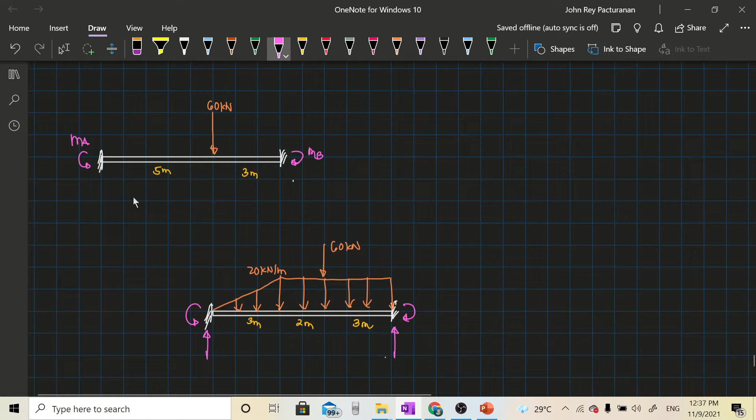This way, we can easily perform the computation of moments on each support. The process is practically the same: find the moments on both ends for each load, then add them. Then consider the beam as a whole to determine the vertical reactions. So starting here, let me begin with the uniform load and triangular load.

Be aware that this is 3 meters and 5 meters. Here, let me place the strip that we need. So this is the strip. Take this as W, and again, the technique for the triangle is to set this as X.

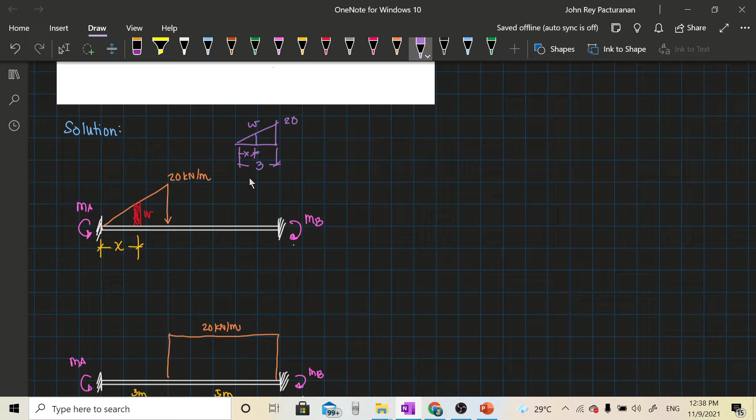For the triangular load, we can perform ratio and proportion. Let me show it here on the side. This is W, this is 20, and this is X, and this is 3 meters. So what happens is: W is to X as 20 is to 3.

Therefore, our W is 20 thirds of X. That is very important. So W is 20 thirds of X. Now that we have the ratio and proportion, this is our X. The nice thing is, this will be set as A equals X. And since the span of our beam is 8 meters, our B is 8 minus X. Take note that A and B always refer to the two ends of our beam.

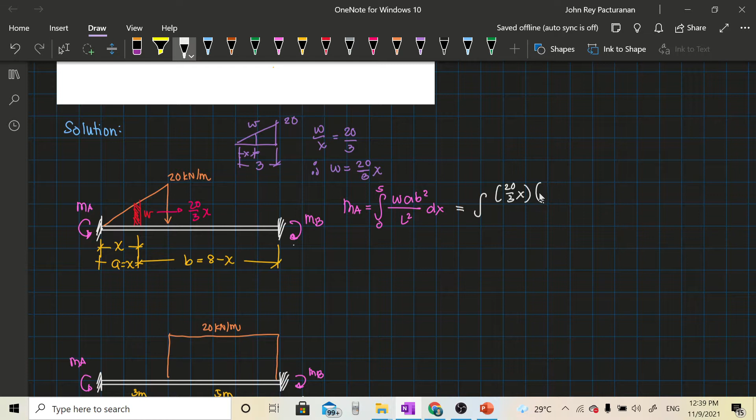So we can solve for the individual moments here. For instance, the moment at A is equal to the integral of W A B squared over L squared dx from 0 to S, where S is how long the uniformly varying load is applied. So W is 20 thirds of X, A is X, then 8 minus X squared, then the length is 8 squared.

The limit is from 0 to 3 only, since the total length of application is simply 3 meters. So, dx. Then let the calculator do its miracle. Our answer is 31.3125 kilonewton meter. So let's proceed to the moment at B.

That is equal to - the only difference is that A is now squared instead of B. The limit doesn't change. As long as you have your calculator, the only thing that changes is the placement of this square. So this will be 20 over 3 times x, then x squared, then 8 minus x, divided by 8 squared. There's no need to retype - just edit the integral already typed in your calculator.

Our answer is 11.8125 kilonewton meter. I am double checking my answer, because it would be unfortunate to make a mistake. Yes, I think they are both correct.

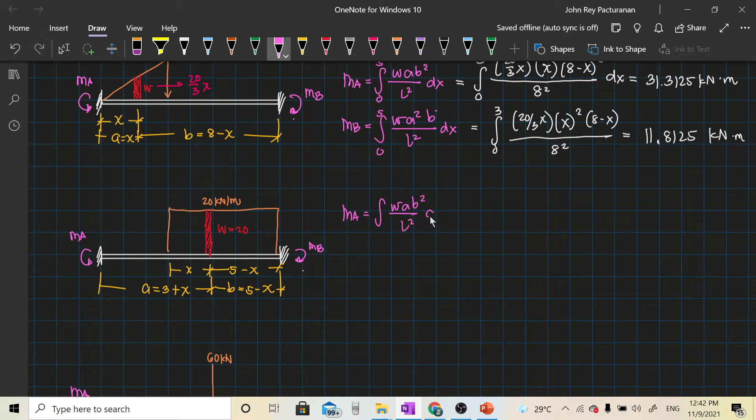So be careful with the integral - you must integrate properly. Here, our MA is the integral of W A B squared over L squared dx from 0 to S, where S is 5 meters since that's the length of application of the load. W is 20, a constant. A is 3 plus x, B is 5 minus x squared, divided by 8 squared, from 0 to 5, dx. Don't forget you still need the dx - just write that down, and it's straightforward from there.

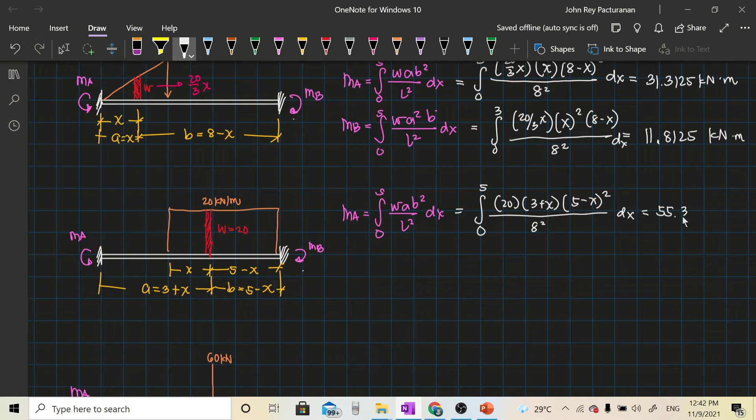So, ang sagot natin, pag kinompute natin is 55.3385 kilonewton meter.

While the other one, for the moment at B, same lang from 0 to S, but this time, WA squared B over L squared dx. Kumbaga, i-interchange nyo lang yung location ng square. So, from 0 to 5 nga ulit yan. So, this is 20, 3 plus x na naka-squared, 5 minus x divided by 8 squared dx. Then let the calculator do its job.

So, ang sagot natin is 90.4948 kilonewton meter. So, ayun.

Lastly, dito tayo sa concentrated load which is basically napakadali lang naman nito. So for instance, the moment at A is equal to PAB squared over L squared. Pag sinubstitute natin siya, that is equal to 60 times 5, 3 squared divided by 8 squared. So, ang sagot is 42.1875 kilonewton meter. Ayusin ko lang yung pagkasulat.

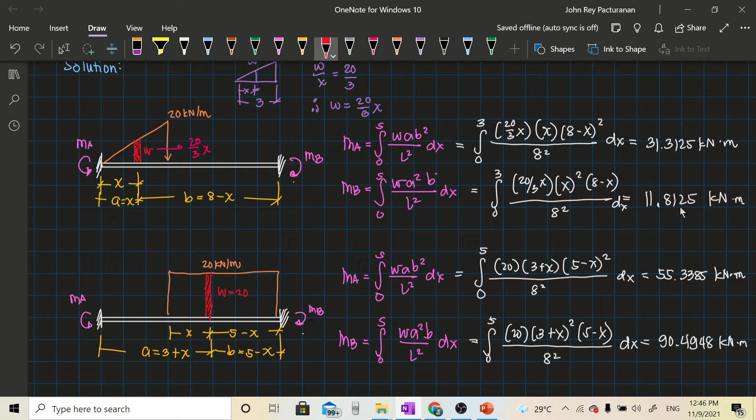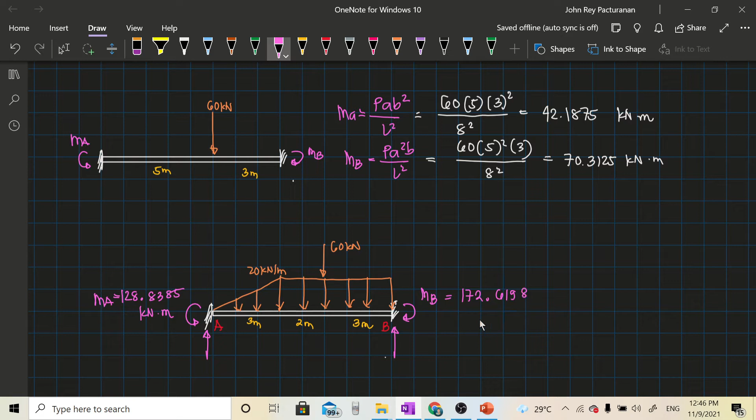Nakalimutan ko pala maglagay ng points A and B. So, for the case of the moment at B, take lang natin yung mga sum, 11.8125 plus 90.4948, then lastly, ito, 70.3125. So, the moment at B is equal to 172.6198 kilonewton meter. So, we already obtained MA and MB.

The next step na lang, class, is of course to solve for RA and RB respectively. And ang gagamitin lang naman natin dito ay yung equilibrium. So, summation moment muna at A, equal to 0. So, clockwise moment equals counterclockwise.

Kapag nag-clockwise tayo, starting with the triangular load, 1/2 ng 3, tapos 20. Yung moment arm niya is of course 2/3 ng 3, kasi dyan yung center of gravity. Followed by the uniform load na 20 times 5. Yung kanyang center of gravity is here, that is 3 plus 1/2 ng 5. Then, lastly, another clockwise moment muna, 60 times 5 meter. And yung mismong MB is a clockwise moment.

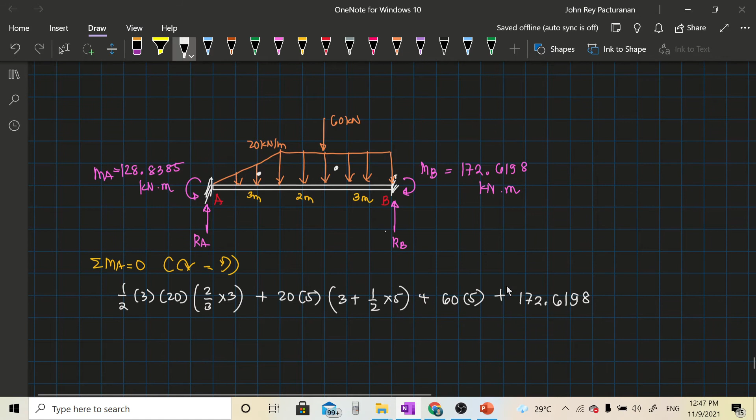So, 172.6198. Therefore, ang counterclockwise moment natin, starting with 128.8385, then plus 8 RB, kasi 8 meters yung length ng beam, yun yung counterclockwise moment ni RB.

So there is no other unknown here but the value of RB. So RB is equal to, I am computing right now. Ang nahanap ko ay 119.2227 kilonewton. Of course, if you want to solve the other reaction, which is RA, the easiest one is summation forces.

Vertical na lang equals 0. So, that is up equals down. Yung upward natin ay RA and RB. And the downward forces are, of course, the load, starting with the triangle, 1/2 ng 3 times 20, tapos yung rectangle, 20 times 5, then, of course, plus the 60 kilonewton na concentrated load. So, that will be RA plus 119.2227 is equal to 1/2 ng 3, tapos 20 plus 20 times 5 plus 60. So, there is no other unknown but the value of RA.

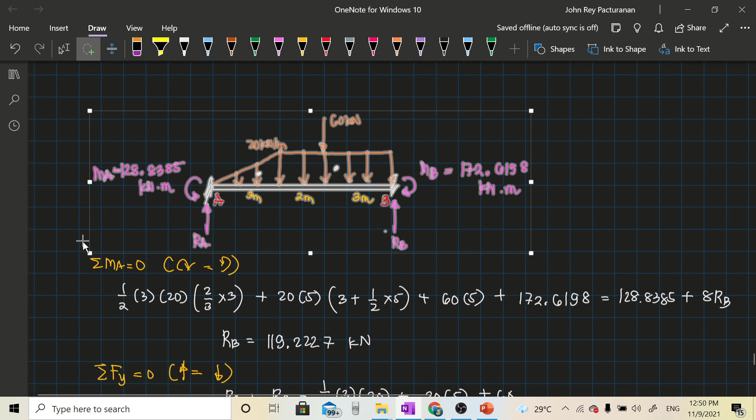So, to conclude this, kasi na-compute na natin lahat ng reactions, we can now simply write it na para maging final. Kahit complicated pa yung ibigay na load, the best way pa rin talaga dito is simply to break down them or break the loads down. So for instance, yung RA is 70.7773 kilonewton. Tapos yung RB ay 119.2227 kilonewton. So, tapos na tayo dito sa problem na to.